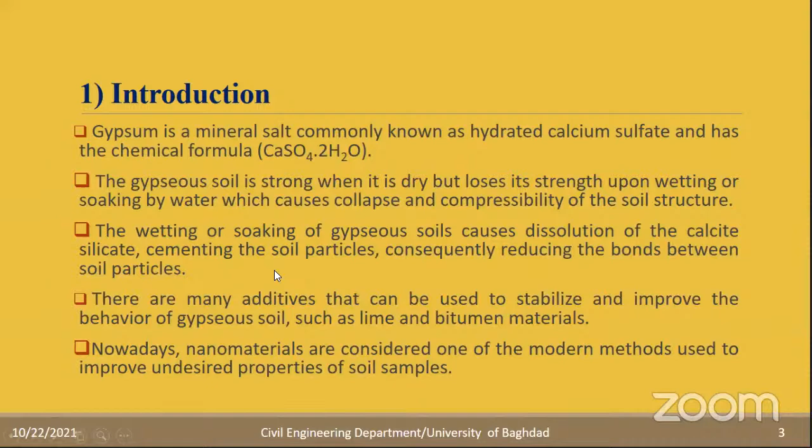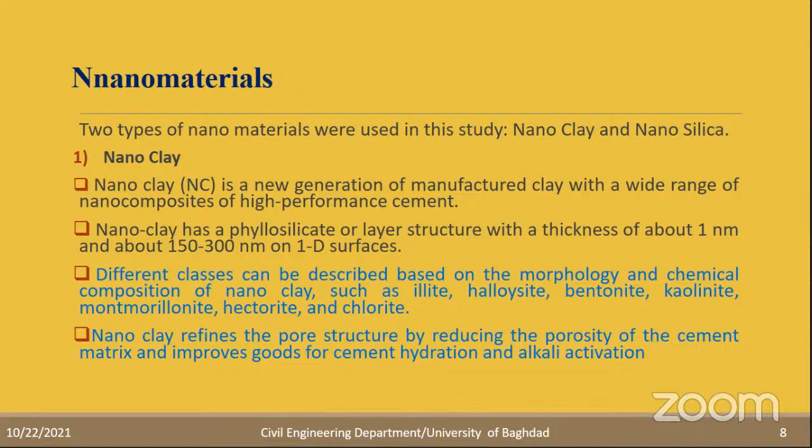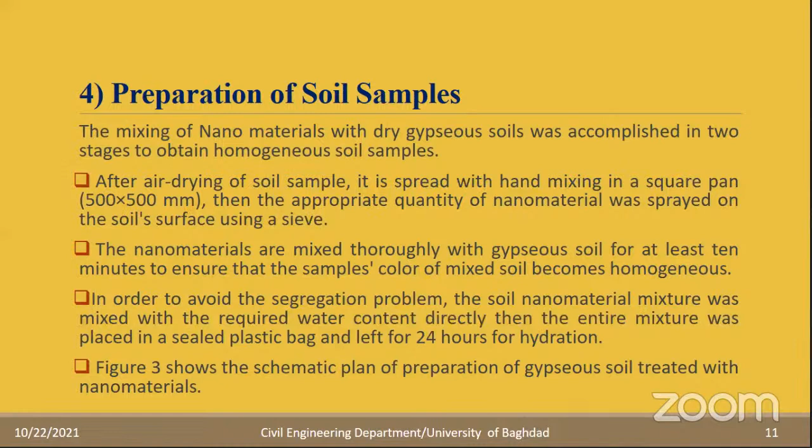Preparation of soil samples. The two soil samples, after drying and grinding, were each mixed with 3 ratios of nanoclay and nanosilica: 1, 2, and 4%. Then the soil samples were left for curing for 24 hours. Then we started the testing program. Figure 3 shows the preparation of the soil sample, mixing the gypsum soil with nanoclay and curing for 24 hours. After that, we can test. Also, we cured for 7 days to check the effect of nanomaterials on the shear strength parameters of soil.

Testing program. The testing program was on two soil samples. Each soil sample was mixed with 1, 2, and 4% of nanosilica and nanoclay. The effect of curing time was also investigated: 24 hours, 3 days, 7 days, and so on. The effect of soaking on the shear strength was also investigated. As I said before, gypsum soil is strong when it is dry, but loses its strength upon wetting or soaking. So it is very important to investigate the strength of gypsum soil upon drying or wetting.

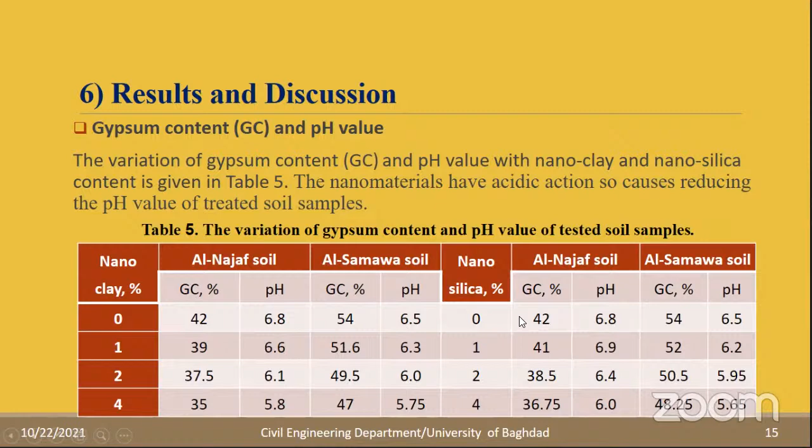Specific gravity and hydraulic conductivity. The specific gravity of soil samples mixed with the nanoclay and nanosilica increased, because the specific gravity of nanomaterials is already higher than the specific gravity of gypsum soil, which is mostly lower than 2.5. So using nanoclay or nanosilica will increase it.

Also, increasing the percentage of nanomaterials, nanoclay and nanosilica, reduces the hydraulic conductivity of the gypsum soil sample. That happened because of cementation between soil particles resulting from adding the nanomaterials, also closing the continuous paths inside the soil samples.

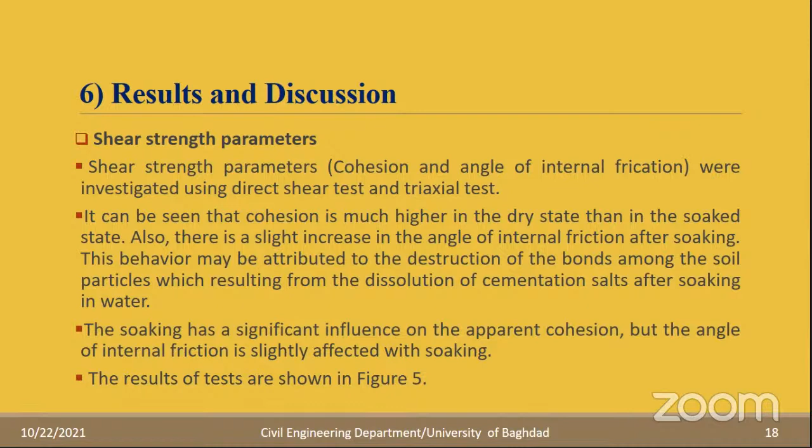Soaking has a significant influence on the apparent cohesion, but the angle of internal friction is slightly affected by soaking. The results of cohesion and angle of internal friction are shown in figure 5. Also, we can see both the angle of internal friction and the cohesion increasing with the percentage of nanosilica or nanoclay for Najaf soil.

Compressibility of soil: one important property is the collapse potential of gypseous soil. It was 15.6 for Najaf soil and 17.15 for Samawa soil. The collapse potential was tested using the single oedometer test at a specific stress, about 100 kilopascal.

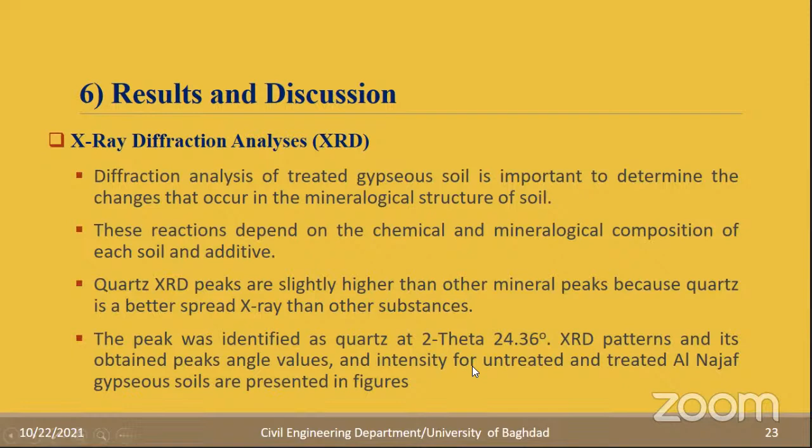Also, we can see the field emission scanning electron microscope, FESEM, images that show the change in the macro and microstructural development of gypsous soil due to the addition of nanomaterial. And we can see that the curing period is very important to give time for reactions between the nanomaterial and chemical compounds or minerals present in the soil.

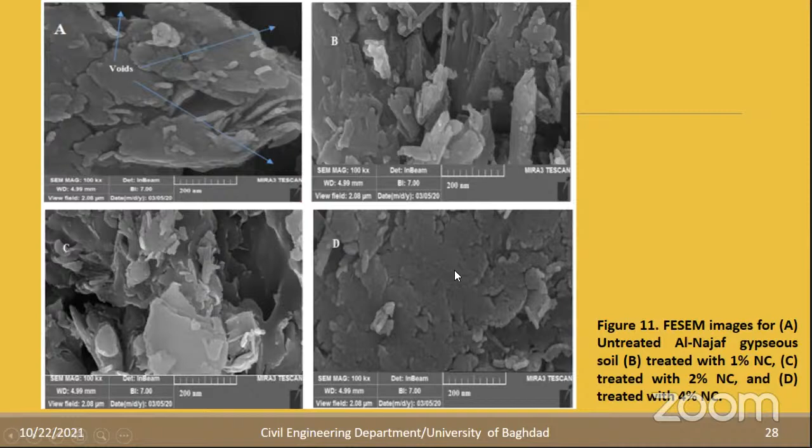So we can see that the image in A shows the gypsous soil before mixing with the nanomaterial. After mixing with 1% of nanoclay, in B, some of the voids are closed by nanomaterials. Also in C with 2% and D with 4%, mostly the voids between soil particles are closed by cementation resulting from mixing the nanomaterials with soil particles. The same behavior was noticed for the soil sample mixed with nanosilica, but mostly nanoclay is better than nanosilica.

Conclusions: mixing nanomaterials with gypsous soil causes a significant reduction in the compressibility of gypsous soil, but there is no worth in mixing more than 1 or 2% of nanomaterial.

There was a significant increase in the apparent cohesion of soil resulting from the cementation of soil particles by nanomaterials, but a slight increase was noticed in the value of the angle of internal friction. Also, the collapse potential of soil reduced after mixing with nanomaterial, but there is no worth in using more than 1% of nanomaterial for both nanosilica and nanoclay.

The hydraulic conductivity of the compacted or treated soil sample was reduced after mixing with nanomaterial, and the percentage of reduction in coefficient of permeability or hydraulic conductivity increased with increasing the percentage of nanomaterial mixed with the gypsous soil. The treatment of gypsous soil by nanomaterial increased the maximum dry unit weight, but at the same time increased the quantity of water required for permeation of the soil sample.

The results from X-ray diffraction, FTIR, and FE-SEM analysis indicated a new phase of the chemical activity of soil compounds treated by nanomaterials. The effectiveness of the treatment depends on the type and quantity of additives, type of soil, curing time, and pH of soil, which play an important role because nanomaterials are mostly acidic and may reduce the pH of the soil samples. References used in this paper.

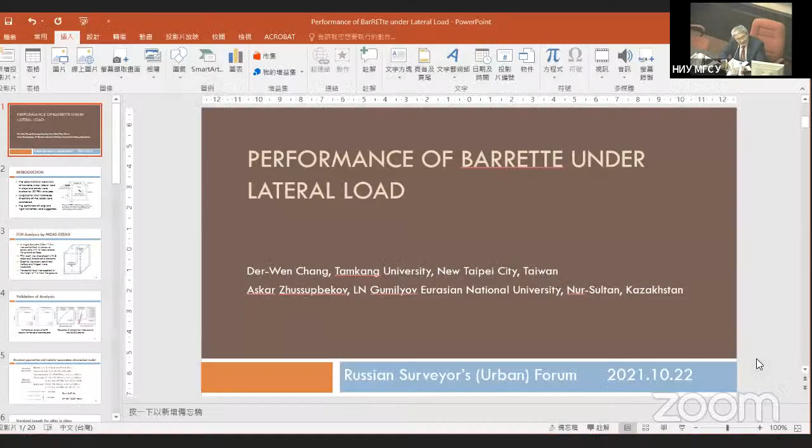Okay, I'm trying to share my screen with you. Did you see my screen? Not yet. Okay, all right. Now it's coming, but we wait. Is this okay now? Okay.

Okay, the title of my presentation is Performance of Barrette under Lateral Load. This is selected from a recent paper we published, and Professor Askar is my co-author. And this is the introduction of my presentation.

In this study, the deformational behaviors of the barrette under lateral load in clays and sands were studied by three-dimensional finite element analysis. The longitudinal and transverse directions of the load were considered. This is very important. When we see the barrette, this is the longitudinal direction, okay?

The longitudinal direction means the load is applied in the lengthy direction. When the load is applied in the short direction of the barrette, it means the transverse direction. And the definition of the long and the rigid barrette was suggested in our papers.

And this is the paper I mentioned. The original name of this paper is Length Influence on Lateral Performance of Barrette from Three-Dimensional Finite Element Analysis. It's published in the Journal of Applied Science and Engineering, a journal hosted by Tamkang University.

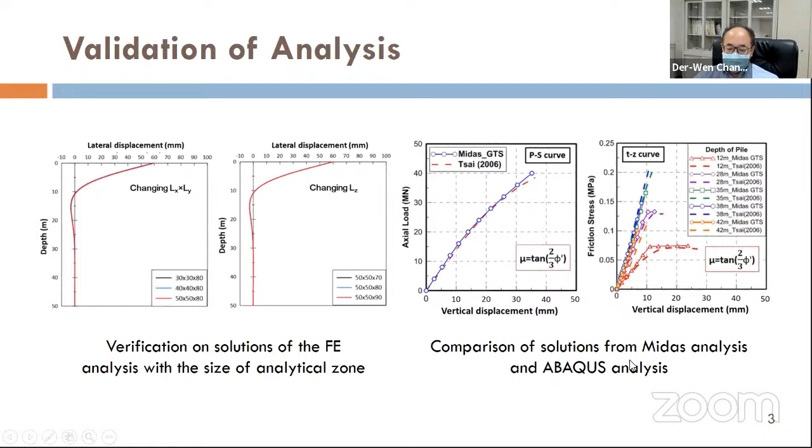And we tried to make some validation of the analysis. As you can tell, we tried to increase the size of the mesh to obtain a stable and converged solution from the analysis. We also made some comparisons with studies by other people using programs such as Abaqus, also a finite element program.

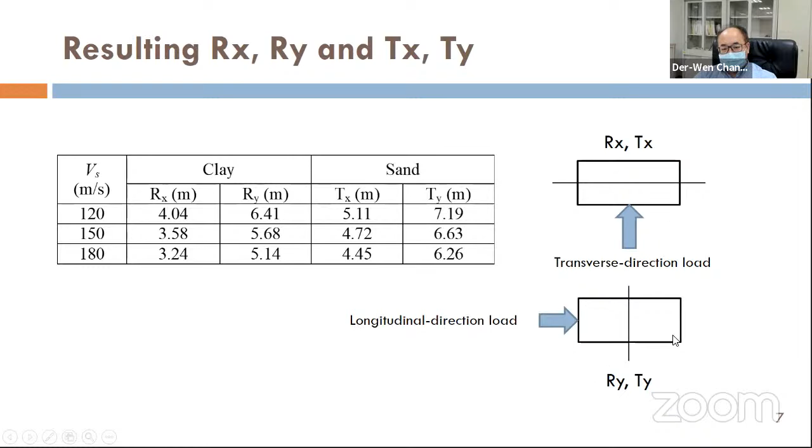And this is the Rx, Ry, and Tx, Ty in our study we calculate, because our shear wave velocity has changed from 120 to 180, and in clay and in sand you can calculate different R and T. Okay, and Rx and Tx mean that the load was in the transverse direction of the barrette. And when the load was in the longitudinal direction of the barrette, then we calculate Ry and Ty.

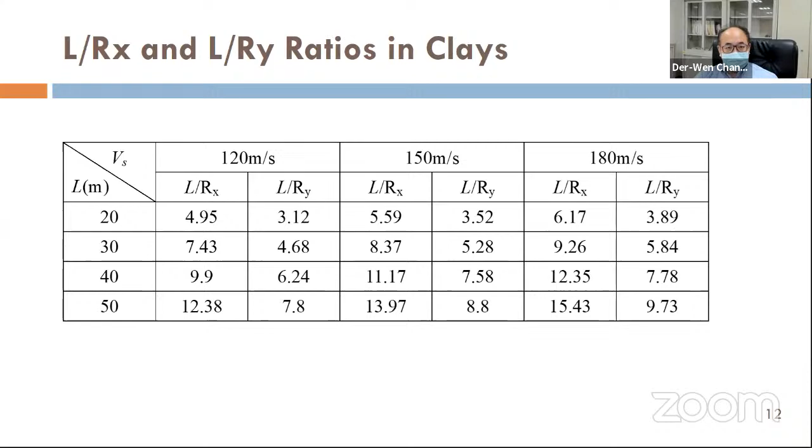So yeah, okay. For longitudinal direction load, we find out that if L divided by Ry is greater than 7, we can define the long barrette, and L divided by Ry less than 3 is for rigid barrette. For transverse direction load, if the ratio is greater than 5, it can be used as a criteria for long barrette.

No criterion is suggested for rigid barrette because most of the things we calculate are always greater than, or around, 5. So we don't have the data for the L over R ratio less than 5. It's difficult to determine the rigid barrette for the transverse direction load.

And Professor, lastly, you have 3 minutes. Okay, I'm about to finish.

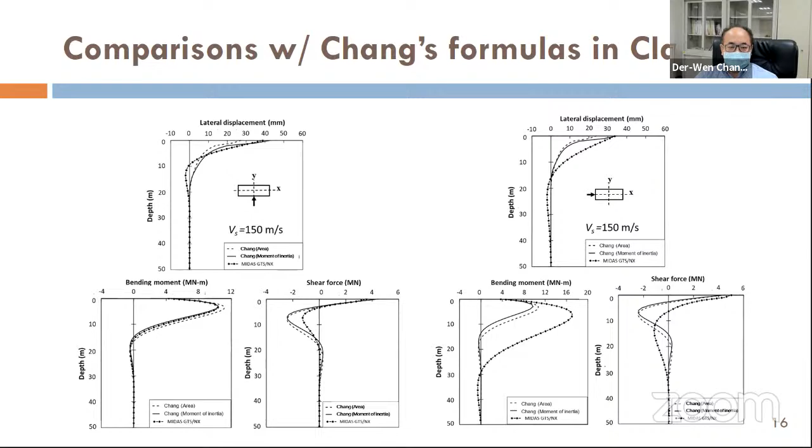We find out the analytical formula suggested by Chang in 1937 on single pile subject to lateral load was found adequate for the barrette in the case where the load is applied in the transverse direction. In order to resolve that, an equivalent pile diameter must be used, obtained from the moment of inertia of the barrette. In any case, if the load was applied in the longitudinal direction, the analytical formula would underestimate the bending moment along the barrette.

This is all the things we found in this paper. If you are interested, you are free to check this paper. Thank you very much for your attention.

Thank you very much, Professor, for your interesting presentation. We have time for one question. Please. Yeah, very understandable, huh? Okay. Thank you very much, Professor Der-Wen. You made a very good presentation, so no questions, very clear. Thank you very much. Please check everything, if you are interested, please feel free to check our paper. By email or in future we will communicate with you. Thank you. Thank you. Thank you.

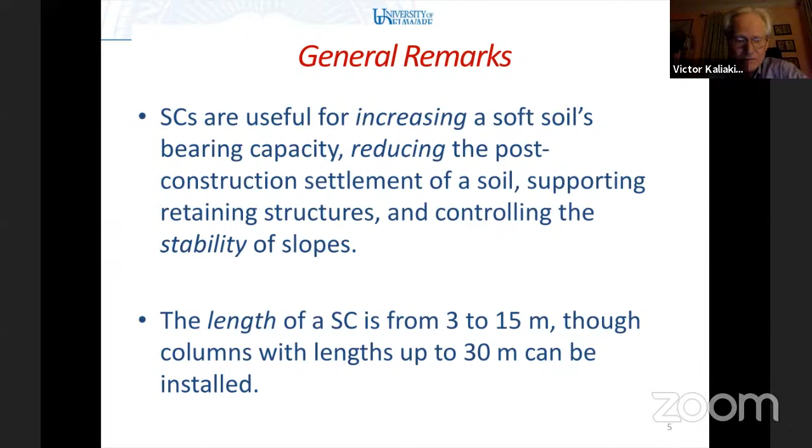One of the problems with a regular stone column is that when installed in very soft soils, typically with shear strengths less than 15 kilopascals, they exhibit a lateral displacement called bulging, especially in the upper region. This largely reduces the stone column's ability to take load and is a limiting factor in their application.

These low shear strength soft soils are prevalent in many parts of the world, so people sought to somehow improve the stone column's performance when installed in such conditions.

The key was to encase these stone columns with some kind of geosynthetic material, typically a non-woven sock, essentially a tube with an end cap of the material. Because it is encased, when load is applied the geosynthetic is mobilized and provides confinement, which increases bearing capacity and reduces the lateral displacement we call bulging.

This confining pressure forms what we call the geosynthetic encased stone column, or GESC, which will be our focus in the talk today.

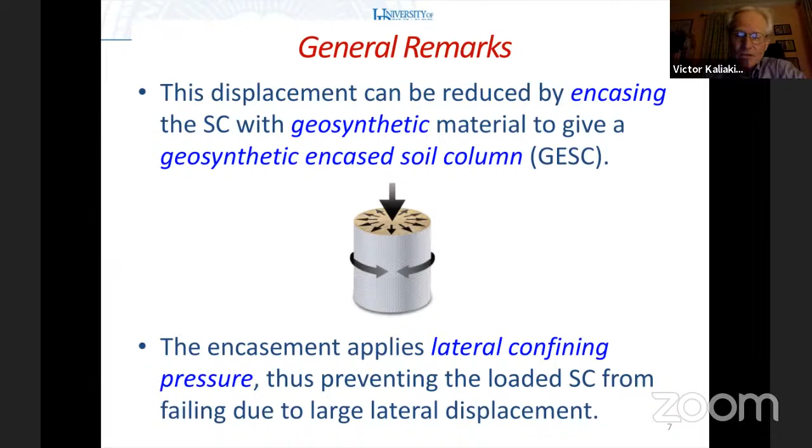Once this was realized, a good amount of work was performed, because geosynthetic encased soil columns are used in geostructures where we need to moderate relatively low to moderate construction-induced settlements.

The prime application was column-supported embankments, as shown in this cartoon, where a roadway or maybe a train runs on an embankment sitting on these geosynthetically encased columns, each taking some tributary area of the structure above. Traditionally these columns would bear on a rigid base, providing support from below using end bearing as the primary support mechanism.

Traditionally, these elements—either stone columns or geosynthetically encased ones—have been extended to a hard layer or stiff stratum, counting on bearing capacity, as shown in this cartoon.

You have some kind of applied load, the column with its encasement, and the bulge or lateral displacement as shown. But the key here is that it's sitting on a firm stratum, which provides substantial end bearing to allow load transfer.

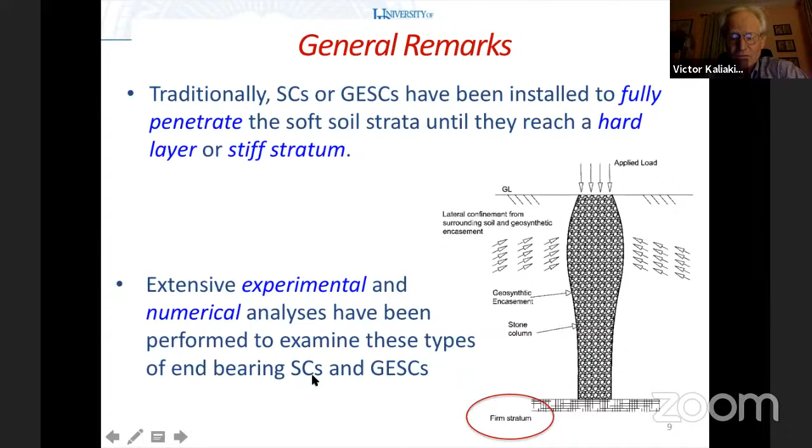Extensive experimental results and numerical analyses were performed over the years to compare geosynthetic encased columns to unencased regular stone columns. Several years ago, my former student Majid Khabazian and our colleagues performed many kinds of analyses, from single column analyses to modeling complete embankments, and also looking at the unit cell concept.

I'd like to present a few results for a single geosynthetic encased soil column bearing on stiff strata, to give us a reference point for a traditional type of analysis.

The same holds for relative vertical displacement—again a big effect—but even more so on skin friction, which I think many people understand better than relative displacement. When we encase a column, the skin friction is affected substantially. This is for a single column, but it would certainly have an effect when you had groups of such columns in an actual foundation.

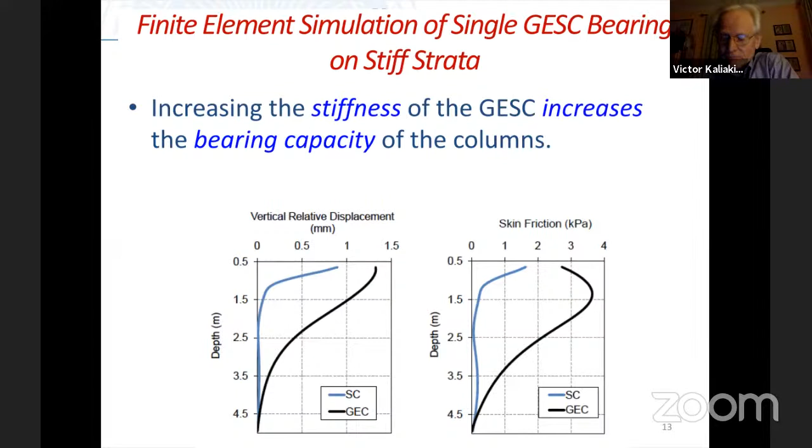Finally, load transfer mechanisms: a stone column by itself, with no encasement, has some end bearing and some skin friction. But compared to a geosynthetic encased column, you can see much more end bearing, and again skin friction is more sizable because of the addition of the encasement. This led to the use of such encased columns in many applications.

Again, typically sitting on a rigid bearing, a rigid layer or a stiff stratum. The realization came, though, that this is not always possible, that sometimes the deposits of clay are very deep or large, especially in coastal areas. And perhaps also we may not want to have the column extend completely to a stiff stratum because of economic reasons. So the question raised was, can we look at columns of these type, encased columns, but that are not driven to stiff strata, because this may be problematic.

So the cartoon is here now. You can see the similar kind of column encased again, but it's not resting on the firm stratum. There is some kind of what we call floating depth below the column for either economic reasons, or if in a very deep clay layer, maybe you cannot reach the stratum in a practical sense. So this is the focus of the work we're talking about today, looking at columns which are floating, if you will, not reaching that stiff stratum, to see how they behave.

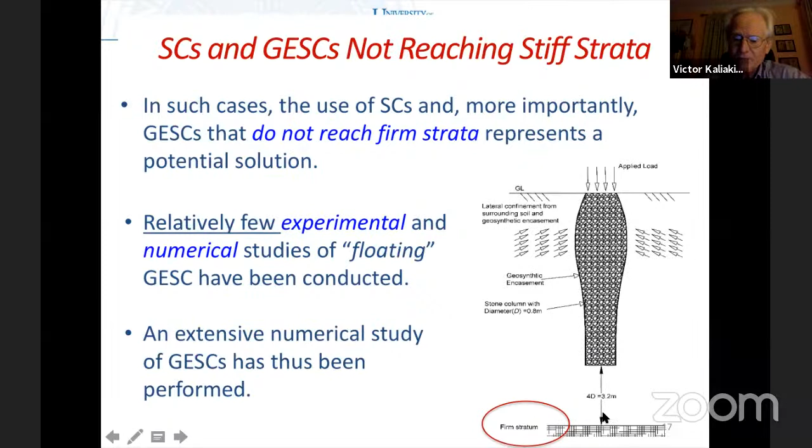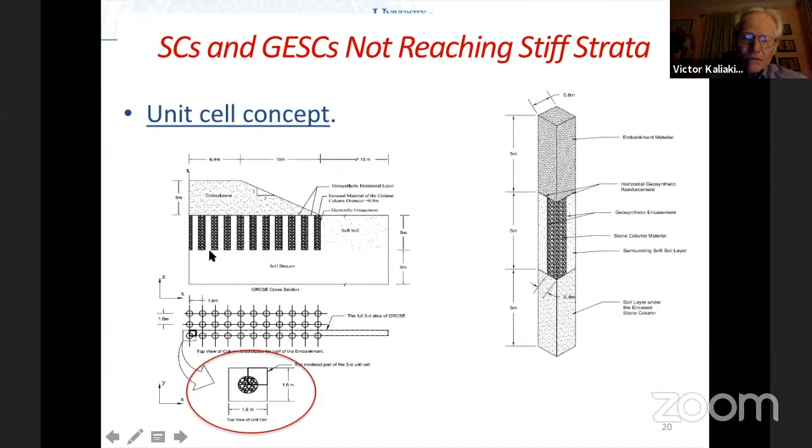We then also finally looked at the unit cell concept, which again relates to a full embankment, but it looks at just one small piece of this. So the model looked something like this, much simpler than the complete 3D model. This is a 3D unit cell model with, again, a floating depth below the base of the column, but above the rigid stratum. So this was extensively analyzed, but now the difference being we had floating columns in all these analyses. My focus here is on single columns because of lack of time.

We found that in our analyses for both rigid and non-rigid based columns, the lateral displacements were about the same, and the bulging extended to about 7 or 8 column diameters when measured from the top of the column. So that meant that it did not matter so much if you were resting on the rigid base or floating, if you will, that the lateral displacement was still about the same and was greatly improved by the presence of the encasement.

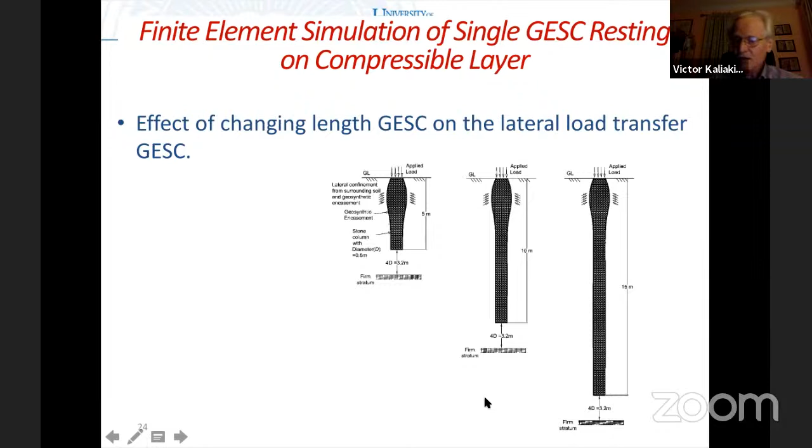In this case, we looked at 5 meter, 10 meter, and 15 meter columns, all of them floating in the sense that they're not resting on the firm stratum, and compared this again to a column resting on a rigid stratum. Now, initially, due to end bearing, short columns resting on a rigid stratum will certainly have high bearing capacity.

And so as you get longer columns, the fact that it's not resting on a rigid base is not detrimental. So if you want to not reach a rigid stratum, or can't because of financial constraints, as long as your column is suitably long, you may be getting the same effect as a column on a rigid stratum. That's an interesting finding, because it now makes these columns resting on non-rigid bases competitive to ones on rigid bases.

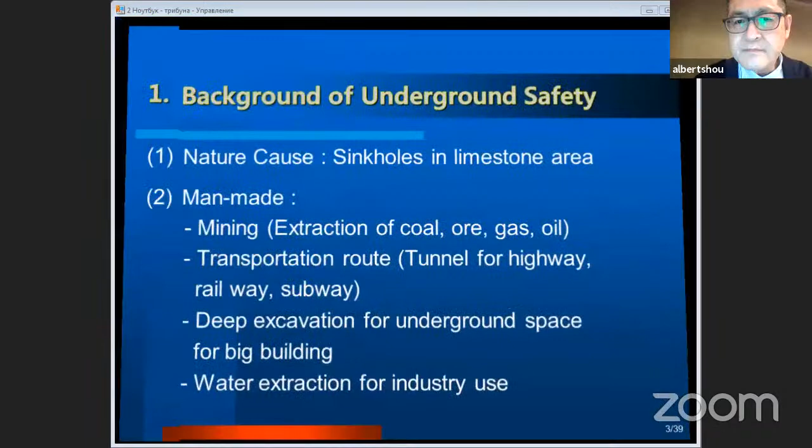So there are several reasons for ground collapse. Natural reasons: limestone areas, Malaysia or the southern part of the United States, and many other countries with karst areas, limestone, normally have sinkholes. And man-made: in Russia, subsidence of mining areas, mining towns, because of digging out coal, minerals, and so on.

And also in downtown areas we have a lot of problems because of tunneling, metro, highways in downtown areas, without any control of the bracing system or groundwater. Another one is water extraction from industrial areas. That may be a big problem. And deep excavation for underground space development, basements for buildings and so on.

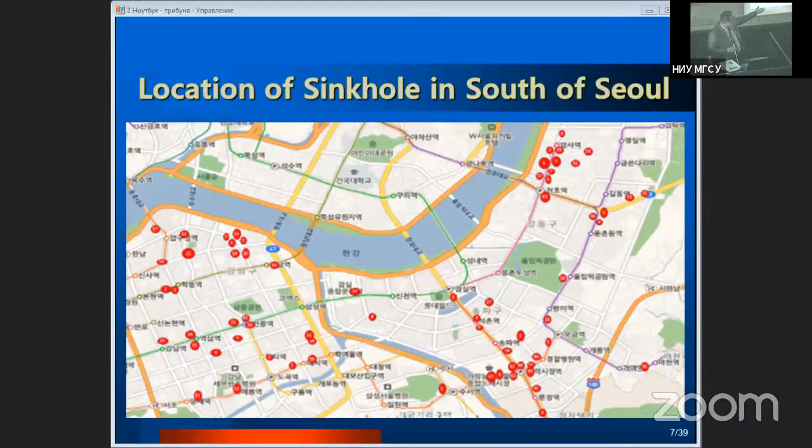Or the sinkholes that occurred. The red dot is a sinkhole, see? Most of the sinkholes occurred in the southern part of the Han River because of a lot of development, so that's why this phenomenon is happening. With the sinkholes and the ground excavation, we have a lot of problems, cracking of the ground surface and so on. And some people sunk down here. So a lot of problems were created.

What happened? They were digging out the soil underground, and then the water in the lake was disappearing, reducing. So a big problem, so the government became aware of this problem.

Oh, what the hell? Oh, it's not taking this program. Anyway, we have another view. Oh. Okay, here we go.

So at the bottom, the last one, there was a metro line under construction. Above it, there's an underpass. On the top there's the ground surface and the high-rise buildings. Meanwhile, we have a lot of sinkholes here, on the right-hand side, and the left-hand side.

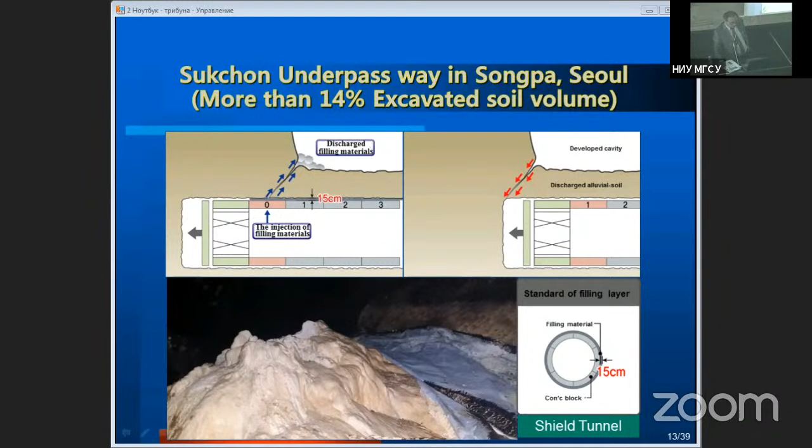And this shield machine is drilling the tunnel like this. So we have sinkholes in several places. We also have old tombs and so on at the top. And we found out, after the shield tunneling, you should backfill the area, but all this backfill comes into the underpass. So it's a problem.

And not only in Korea, but in other countries. I know in 2013, Professor Ilyichev, president of the Russian Geotechnical Society, came to Korea, to my university. He presented a paper about metro construction work in Moscow. Many years ago, you had a similar problem. Also the UK and the United States, near Florida: all of a sudden a high-rise apartment complex collapsed. Evidently there was a sinkhole down below. Even in developed countries it happens like that.

So during construction work, you need good control of the displacement and also waterproofing. Otherwise, you have a lot of problems. Factors influencing the ground surface include the soil properties and so on. All of this occurred in July, because July and August are the monsoon season, a lot of rain comes into the ground. And mostly the detrimental effect came from old sewer lines, wastewater lines, maybe more than 20 or 30 years old.

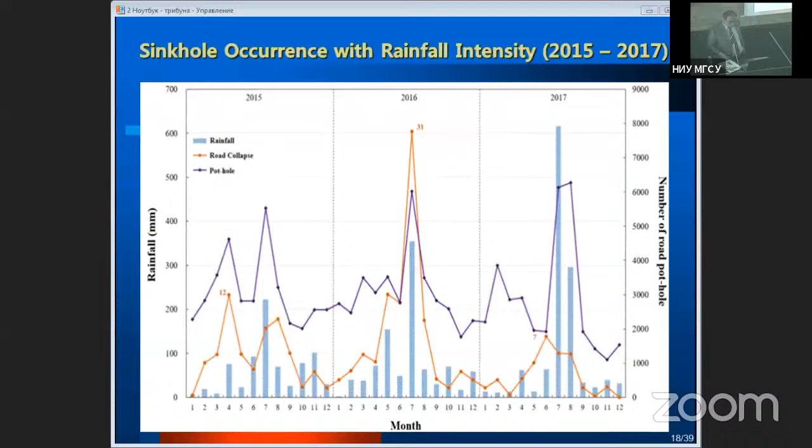During the excavation, vibration and loosening soil loosen the connection parts, and when heavy rain comes, water seeps down. That creates a big problem, we found out. Another factor is rainfall intensity, all happening in August or July. So we've got to be very careful.

We requested that the government and the Congress establish an underground safety law. So we are good friends of the politicians. See, engineers, if you are not working and you need something, work with the government and the politicians. Put it into law, so we can get a job.

Now they acted in 2018; the government made an order. If we excavate more than 10 meters, you have to submit a small-scale underground safety assessment report to the government, okay? So your home is okay, the government will control the safety. But if we have more than a 20-meter excavation, a heavy report on the assessment of underground safety. So this is a really great deal.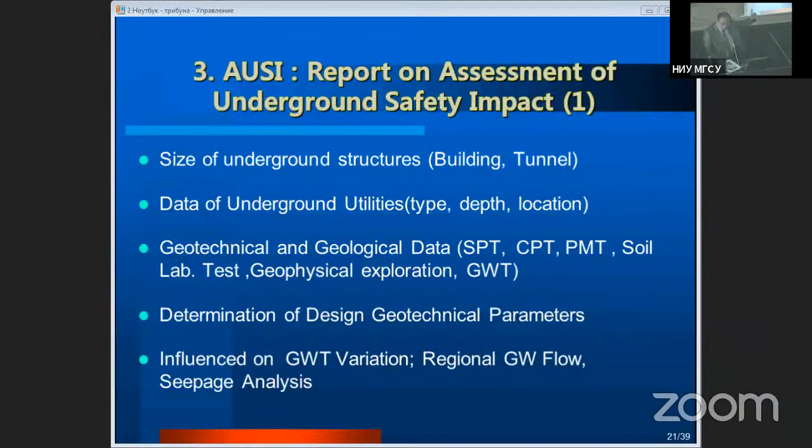So the report should include all these data: underground utilities, and also geotechnical data, geological data. This is very important. They like to have a soil investigation. So if you spend more money on soil investigation of what the ground is like, okay, you're safe, and you save money. This is more important. You need more than 3% of the total budget, then happy. Somebody says 1%. That's ridiculous, you shouldn't allow that.

So like this, gravity stability, stability of underground. This is a chart. Okay, in the report you should write one by one, following all these. So that's very important. Okay, they write a detailed report.

Many young engineers should do it. In South Korea, many companies want to hire young engineers. They don't want to work for the private company. We'll give you good money, $30,000 or $40,000 per year, but they don't want to work. They want to work for the government and relax, a government company. That's too bad, we don't like it. But anyway, this is important, so you should negotiate with the parliament, congressmen, and put it in the law.

And the monitoring, many regulations. Russia also had a regulatory requirement, right? To control the safety. And the British also, we looked at it, and the Korean standard. And this is one of the examples I just found before coming here.

This is a 9-story building, and this is Incheon Bay, we have a coastline here, right? This is a bay, and if we excavate, what happens? Seawater will come into the basement here, underground, unless we have a good water barrier system. So this is one example, like this braced cut. We have struts, anchoring, or slurry wall also. So maybe somewhere here an underground utility is very dangerous, because of deep excavation, water seeping out, there may be some settlement problem. So we check out everything.

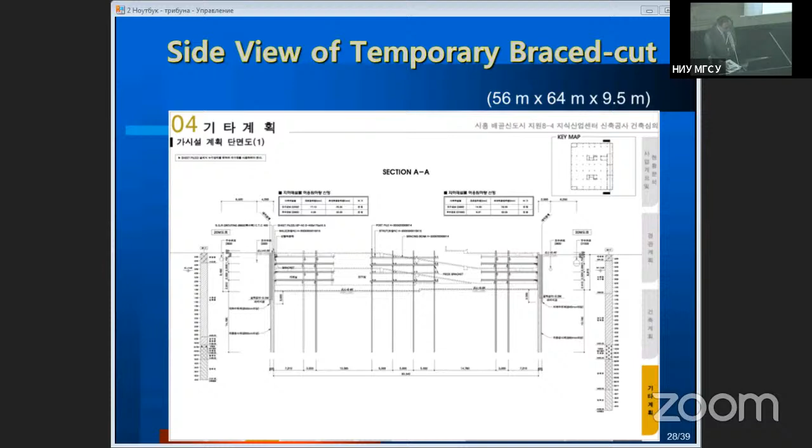I'm one of the experts, and also instrumentation: inclinometer, groundwater table, strain gauge, settlement plate, and so on. These are the monitoring devices. And not only this site, also in the adjacent building, we put gauges. You can see it during the excavation. If we do deep excavation, we have an automatic monitoring system. There's a red light, yellow light, green light.

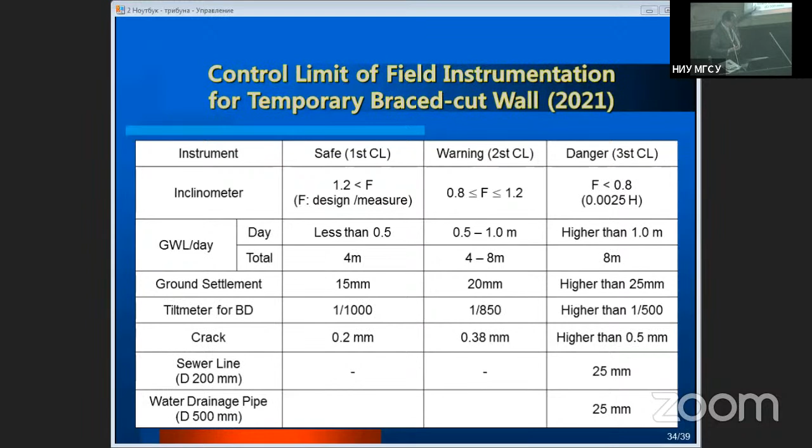So for the displacement, any variation below the allowable line, green light. But with a large deformation, maybe the yellow line, warning, and red light, stop construction work, like this, okay? So this is the variation of allowable settlement and so on. This guideline is very important, so we follow this rule. You write the report and the numerical simulation, for small size, the water seepage, and the larger area, mud flow, ground control. So these are the values we follow, okay? I could go into all the detail, tilt meter and so on.

And also during excavation and tunneling, sometimes rock blasting, boom, like this. So there's noise, okay? And some vibration, in kine, right? Centimeters per second. So for livestock, national treasure buildings, residential areas, we normally control 0.3 kine, centimeters per second, right? Like this, okay?

Even in residential areas. And this is the noise level, boom, a big sound, so your baby is crying, right? Your baby is crying, so what do you do? Blast at 11 o'clock, okay? Two times blasting, 11 o'clock or in the afternoon, 3 o'clock. The husband goes to the company, the housewife washes dishes and then goes shopping at 11 o'clock and 3 o'clock. So we blast like this, civil engineers.

We are very clever, so see, this is important. This year alone, for the estimation of underground safety impact, there were about 1,000 cases at the 10 to 19 meter depth, and another 200 cases for excavations greater than 20 meters deep. So by the money, how many people can work there? Geotechnical engineers are very happy, very busy, so you can make good money out of it.

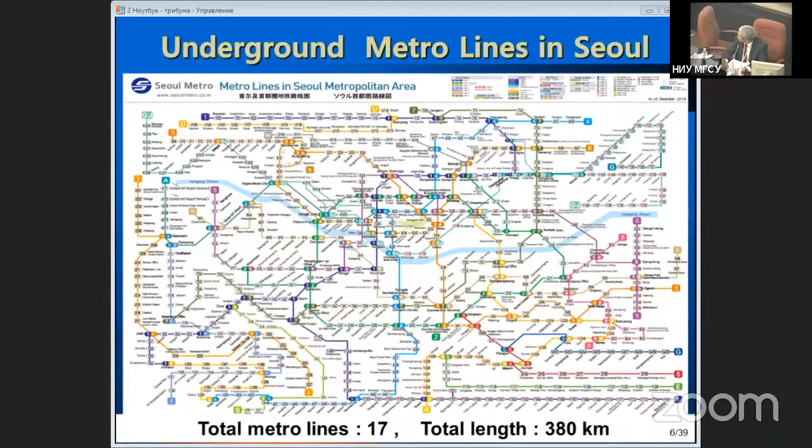I don't know about Kazakhstan, you may have it very soon in the Astana area, so you've got to replace the old pipelines. So we don't control it, but it's very good for geotechnical engineers anyway, we're happy, anything happens, we have a job, construction work in downtown Seoul. Thank you, Professor, for your interesting presentation.

So now we must move to another question. One question from our moderator, Professor Shulyatyev. Thank you for a very interesting presentation.

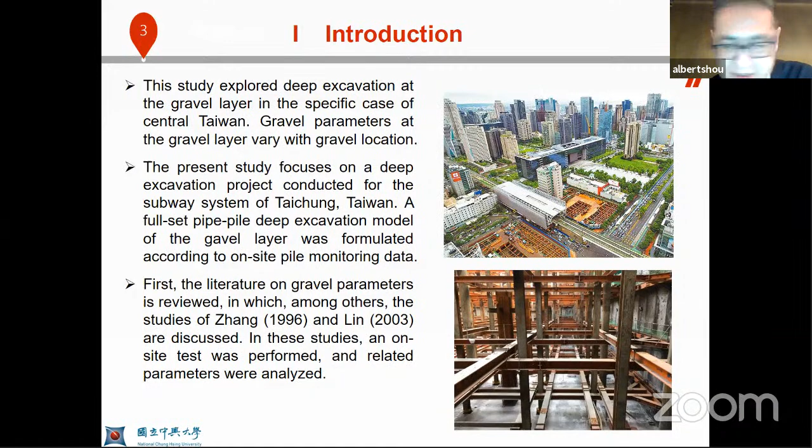This study can be separated into two steps. The first step is to do a literature review to see what the range of parameters would be. Although we do have some projects done in this area, we tried to collect the data first, then do sensitivity analysis and try to match results from numerical analysis with the monitoring data, so we can have a better idea of what the actual parameters would be.

The numerical model we applied is FLAC3D, and these are the theories behind it. I think you can easily find that, so for the sake of time I will skip this part. Basically, it can be described as the damage strength part and the anti-tensile strength part. There are a lot of parameters behind this theory, but we try to use this model to do the three-dimensional analysis in a very simple way. We use the Mohr-Coulomb criterion for the analysis.

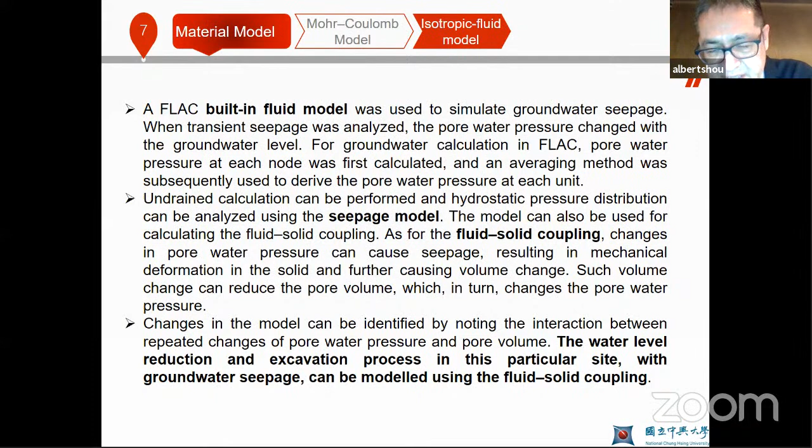Since there's a groundwater condition on this site, we also use the built-in fluid model. The seepage model is considered, and also the water reduction and excavation process on this site were simulated by the numerical analysis. We have detailed numerical steps to simulate the construction and the groundwater condition, since we have a dewatering job through the excavation. So the fluid-solid coupling model was applied, and the construction steps, support steps, and dewatering steps are also simulated by this three-dimensional analysis.

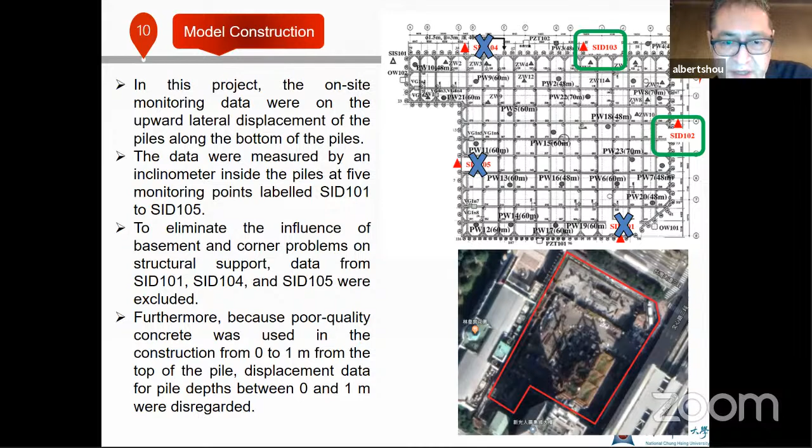The first step is, if we use the average parameters, the monitoring data and the numerical results are not totally right, especially the maximum horizontal displacement—there are some discrepancies. So we try to use different friction angles first, to see which friction angle is more feasible.

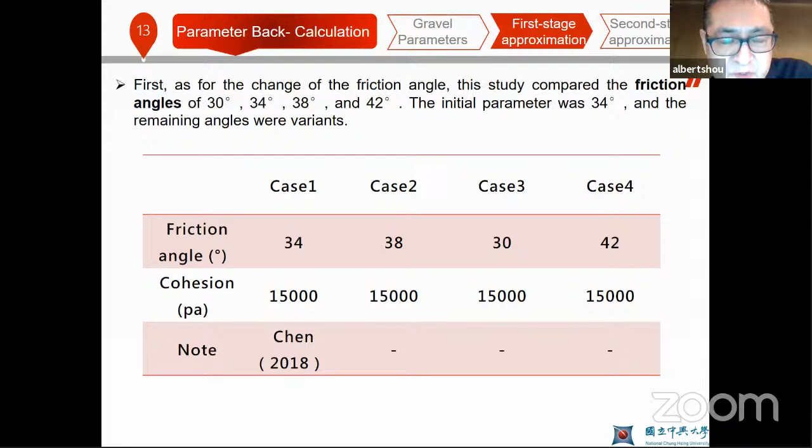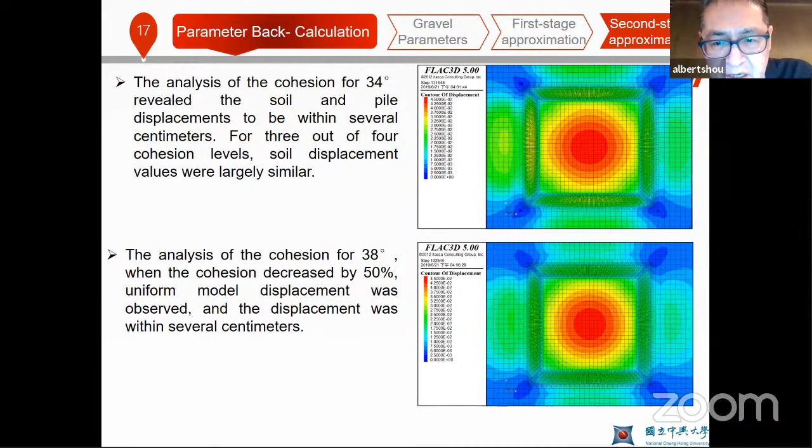The results suggest that 34 degrees with 35% reduction of cohesion, and 38 degrees with 95% reduction of cohesion from the average value, can get the closest results. But for the second case, the 38 degree case, we found that there are some plastic strains appearing between the casing piles. I think this is not right, because in the field there's no such behavior.

So finally, based on what we analyzed, we suggest that a friction angle of 34 degrees with cohesion of around 9,750 Pascal could be the best fit parameters for future design in this area.

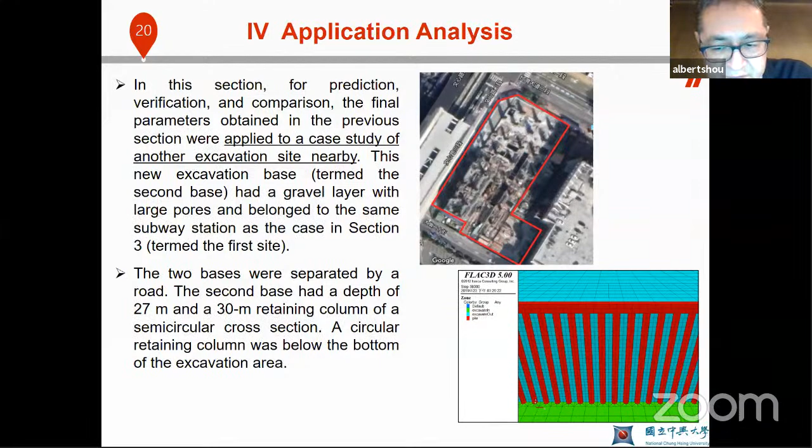Then we used this data for the other site, since we have 2 sites, to verify it and see whether it is correct or not. The results suggest that the maximum number is close to the monitoring data. However, the depth of the largest horizontal displacement is not in very good agreement—there are some discrepancies.

The discussion about the discrepancies can be summarized in 4 points: the soil parameters could not be exactly the same, because this is alluvial formation, and also the geometry of the excavation for the 2 sites is not the same. Third, the groundwater condition could affect the analysis results. Finally, there might be other labor-related conditions that could affect the results.

So I would like to skip this one.

Finally, I would like to give a brief conclusion. The results suggest that 34 degrees with 35% decrease of cohesion could be the best fit for the data analyzed in this area. Also, on-site data and test results could be suggested to avoid the discrepancies seen at the second site. I think other factors should also be considered to make sure the data is more suitable for the specific site. So this is the conclusion.

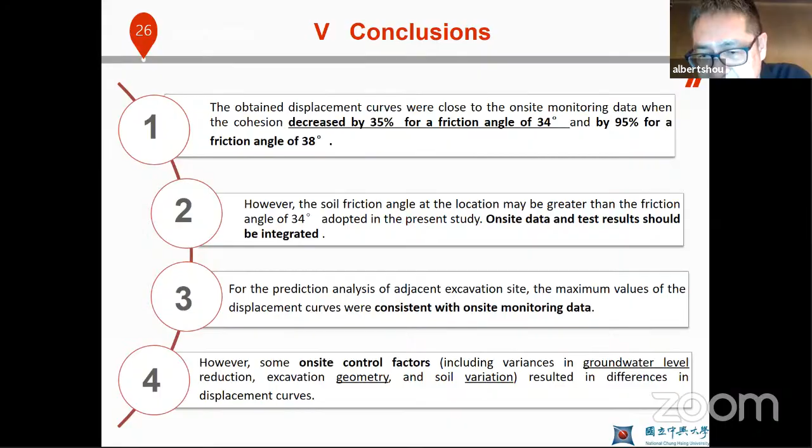Is there a question? So thank you, Professor. You made a very clear presentation, so no questions. No questions, okay, thank you very much. Thank you. Okay, safe trip to you. Thank you, see you later. Bye, see you.

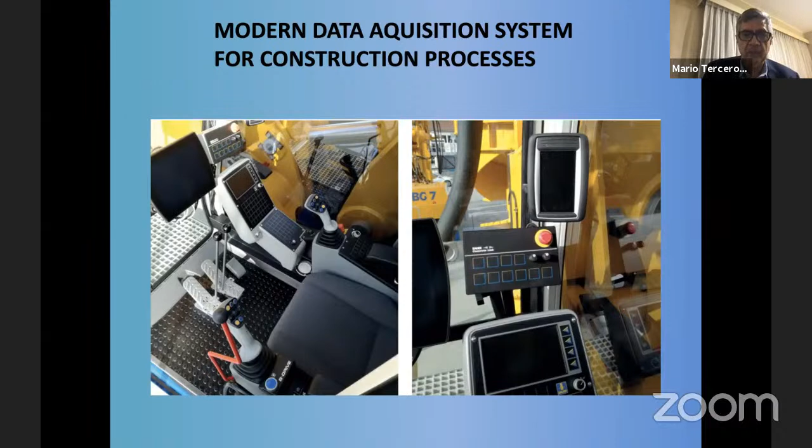In our recent experience, we installed around 600 piles, and we had all the information with these methods, then we performed 3 or 4 loading tests, cross-correlated, and the difference was less than 10%. So the more information we get, the better we know the results. So the question remains: what about when the information we get while installing piles is not possible to correlate? For example, if I'm drilling a pile I will get depth and torque, but it's very difficult to correlate that with the capacity of the pile unless I perform a loading test. And mainly in drilled piles, the problem is the tip.

So now we will present 2 technologies that not only highly improve the behavior of the piles, but also allow us to know what is happening in 100% of the pile toes.

Oops, I don't know what's happening.

Okay. The first is tip grouting, which we call smart cells. When we know the behavior of a pile, the response of a drilled shaft, we know that we have the tip resistance and the friction resistance, and the first problem we find is the non-compatibility between the allowable deformation of the shaft and the tip. So that's a typical curve for shaft and tip resistance, and we can know how much we would need to move the tip in order to get the maximum resistance, or at least the highest possible resistance.

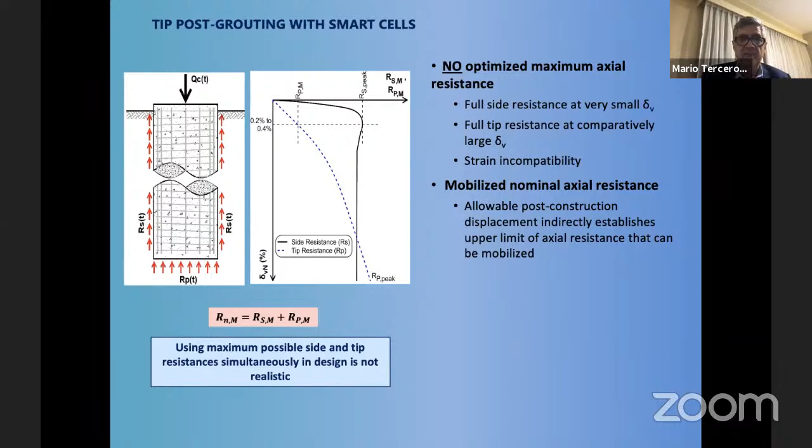What happens if we grout the tip? For tip grouting, we can have several methods, from open grouting with tube à manchette, with the flat jacks. But all those methods just give us raw information about the volume and the pressure. But if we don't have confined the pressure, the problem is that we really don't know accurately where the grout is going. And if we don't have enough deformation of the element, we are not really improving as much as is possibly needed. So what we will present here is a method.

It's like a bidirectional cell, but of course not so sophisticated nor so expensive. So we can not only compact and preload the tip of the pile, but also we measure with telltales the movement of this cell. So we are performing a loading test in 100% of the pile toes, while we are knowing the soil conditions and we are knowing really the resistance of the pile.

That's the typical presentation, where we have here an ungrouted tip, and here we have a grouted tip. What is happening there? We are pre-mobilizing, we are pre-deforming the tip. So the pile, when it starts to be loaded, first has to overcome the preload we had. So in that case, we are making a much stiffer pile with a much stiffer response, and with a very important compatibility of deformations for the maximum load of the shaft and the tip.

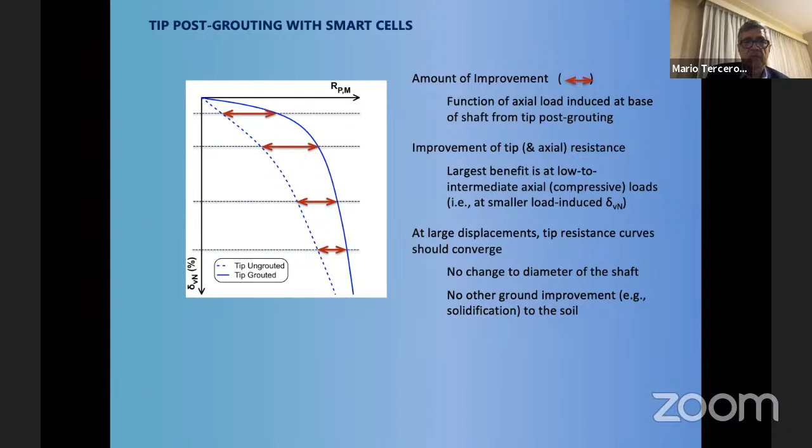This is just a sketch, but mainly in the smaller to medium deformation, let's say up to 100 millimeters or 150 millimeters, where almost no structure will have this allowable deformation, we can really get a big improvement, because if we move a pile, let's say 30 centimeters, of course it will converge with all the improvement of the bottom soil, but that's not acceptable in any kind of structure.

So the question is, why do we perform it? The first thing is we optimize design, because with exactly the same pile, we can increase the resistance dramatically. In some cases, we have measured up to 100% improvement of the pile resistance. And in that case, the risk is mitigated because we know what will happen. We know the behavior for each single pile.

And the scary thing is that in some cases, even for one block, we have a really big variation of response, mainly in very new soils, quaternary soils, close to very new rivers, where the sediments are really erratic. Knowing that, we have very high quality control, quality assurance. And of course, if we get a stiffer response, we will get cost saving and time saving. In one project with 90 piles, we reduced 6 meters per pile. So the construction time was significantly smaller, and also the final cost.

This is the typical presentation where we have this element. We surround it with a geosynthetic because we have a controlled leaking in order to cement the cell outside of the main body. And here we have more details of how it works; it's like a bidirectional jack. And the good thing is that we also have, and here I forgot to draw it, telltales. So when we move the cell downward, we know for each pressure the force, multiplying by the area. We can know the deformation.

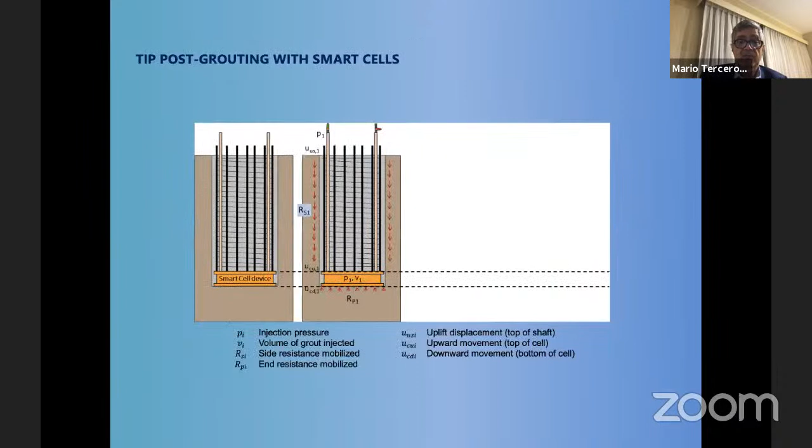Here is the general presentation of the cell, what's happening, and you can see that starting from the closed cells up to the open cells, in some cases we can even move the pile upwards. And in some cases we have calculated that the assumed friction or shear resistance was 4 times the one we measured. So the problem is that in some soils the calculations are very, very far from reality.

So what are we doing? We are premobilizing the tip resistance while stiffening the soil. So we are greatly improving the performance. This is a real case where we started to mobilize the cell. So we had a very low stiffness. This part is always around 20 and 40 millimeters, and we consider it debris compaction. Then we start to compact the natural soil here, and at a certain point, this compaction is very small because the shaft starts to move up.

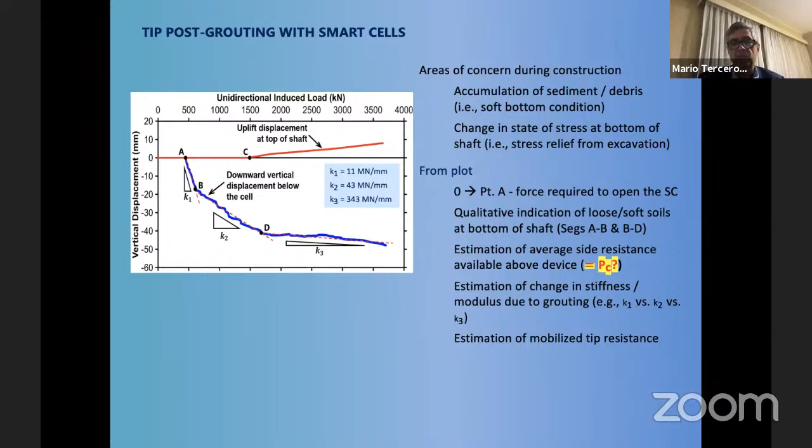At a certain point, the shaft will move without any additional movement at the top, at the bottom. So this is a typical bidirectional result. So here we got 3,500, but summing both, we put 7,000 kilonewtons for a pile that was designed to work at 5,000 kilonewtons. So this pile will have only elastic deformation at the moment of the service load.

And here we show that those are injections for different piles in the same block. The same here. Here we can see the differences that are much bigger than here. Okay, those are not so important to present now.

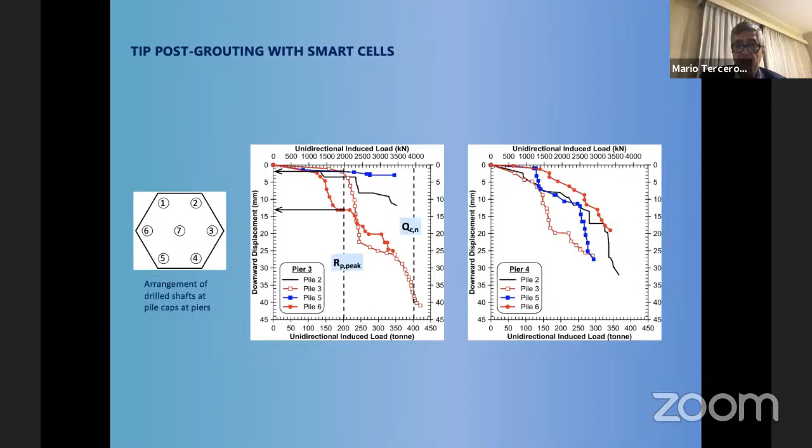And in a mini case story, a work we finished 3 months ago, we have here the soils, we have all the information, and that's the interesting thing. In a block with 7 piles, those were the injection records. We mobilized up to 40 millimeters, but when we performed the static load test, the maximum mobilization for 900 tons, 9,000 kilonewtons, was only 10 millimeters. So this pile could have resisted twice what it was designed for.

Okay, some conclusions of this method. As we talked: preload, premobilize, compact soil, optimizing design, stiffening the formation, reduction of post-construction settlements. We can shorten the length quite a lot. We also have all the analytical methods. The FHWA has a very good compilation for this type of design. We have a reduction in carbon footprint, and of course the compatibility of the formations.

The other method, which I will go through as fast as possible, is the expander body, which basically is a steel balloon that you install at the bottom of a pile or of an anchor, and once there it is expanded by injection of grout. So we pass from 12 centimeters up to, in some cases, 1.2 meters. Typically, we use between 600 and 800 millimeters in diameter. And okay, here are the models.

And what are the advantages? We can have a very important cost reduction. The time reduction is great, because if we double the capacity of the pile, then we diminish the quantity of piles to be done. And we can know, with a curve that I will show, the behavior of the soil, like a pressurometric test. We have even used it in one case in very soft rock, not to mobilize the rock, but to get a very high shear resistance between the rock and the element.

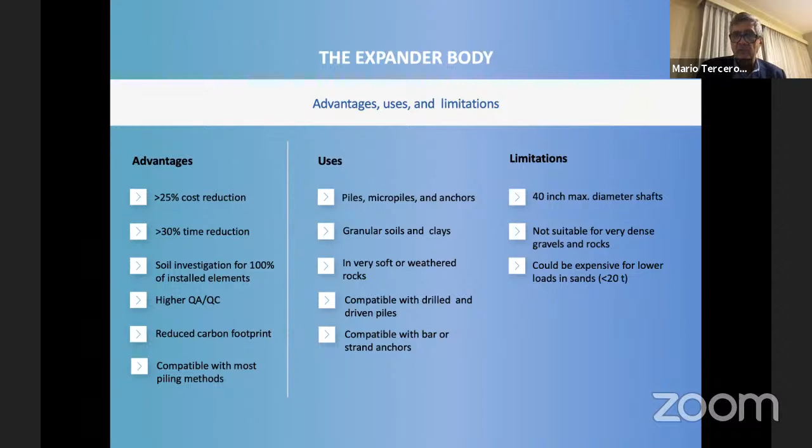Of course, the limitations: for low loads it is not an advantage because you always get high resistance, and typically the shaft should be less than 1 meter. So the maximum loads we have got in service are around 5,000 kilonewtons, but for many buildings that is more than sufficient, because we have blocks. In one case, we had a block of 200 piles of 300 tons each.

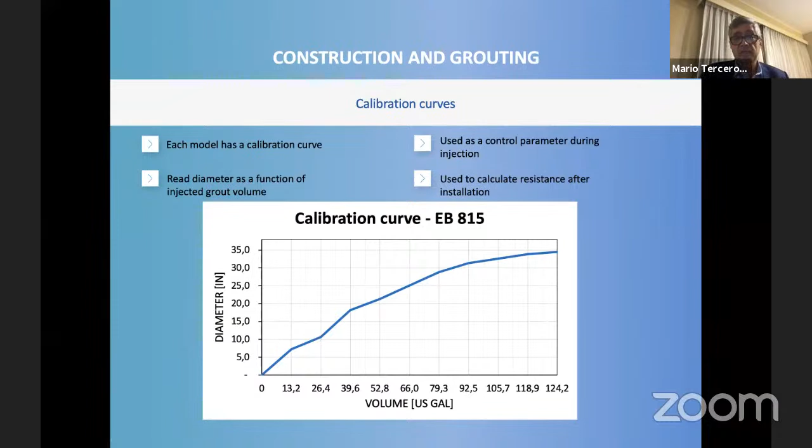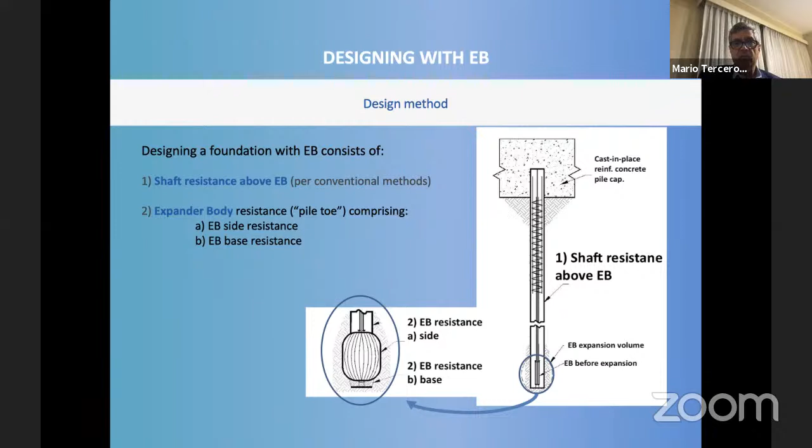We also provide post-grouting because in soft soils it helps to reduce settlements. And it works like a pressurometer, and that's why we get the typical injection curve, which is very similar, but this is a very high deformation pressurometer. We have performed several loading tests and correlated them for different elements with CPT, SPT, pressurometer, and other methods. So as we get so much information from each pile, the correlation with the loading test is much more accurate.

Okay, here are typical methods of calculation. The method based on the pressurometer is perhaps the most accurate one, but we have also made correlations with SPT. I don't like it, but the problem is that in South America it is a very common test, and we use a lot of CPTU.

This method has also been calibrated for the local soils, because as engineers we also have a parameter that varies from 1.9 to 4.5. So if we don't get a good calibration, it's kind of crazy. But now we have installed more than 30,000 around the world, and it really works.

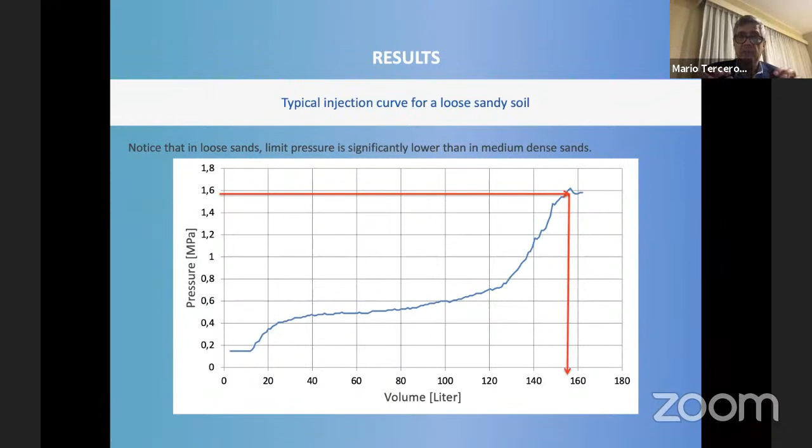What happens if I have a loss of pressure? Then we know at which pressure and which volume, and we can calculate. All those are real curves. This is a very soft sand. And at the end, all goes to the critical condition, because the concept is that the shear is fully mobilized around the element.

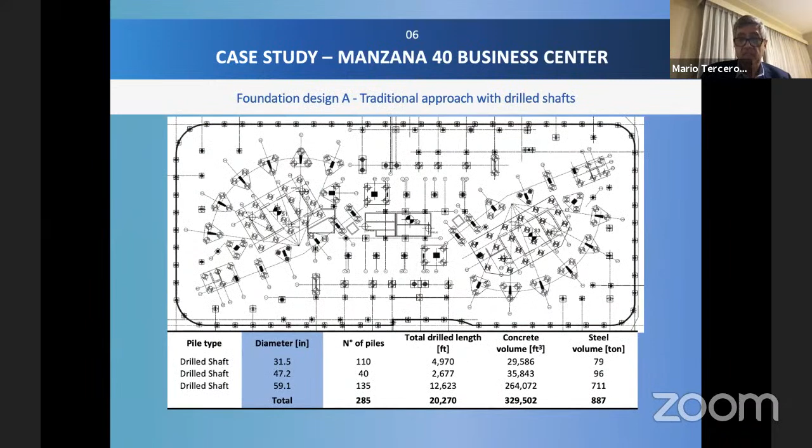And this was a summary of different piles without any kind of tip improvement and with expanded body or full displacement piles. This is a case where those buildings were finished 6 months ago. This is a big project with more than 800 piles. And in that case, we saved 63% of the volume of concrete, the same in steel, and in time, and in cost, because with higher concrete quality, of course, it is cheaper and faster, much faster.

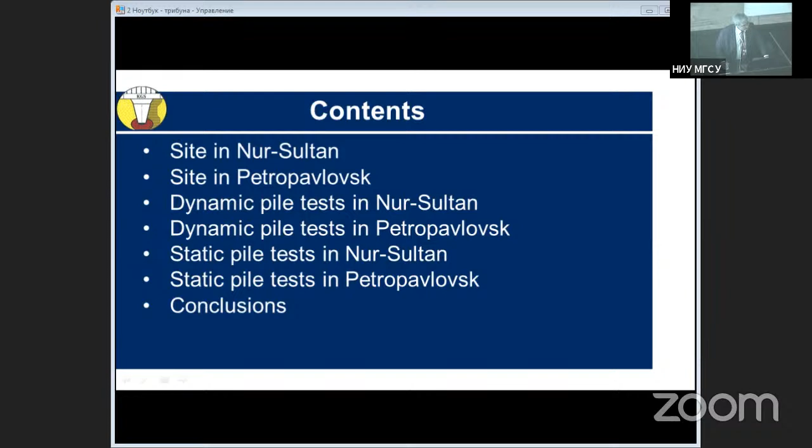So this is the site in Petropavlovsk. This is a little bit smaller because it is not as big a city as Nur-Sultan, about 540 beds. This is also a very interesting project because in Petropavlovsk the soil ground is different than Nur-Sultan.

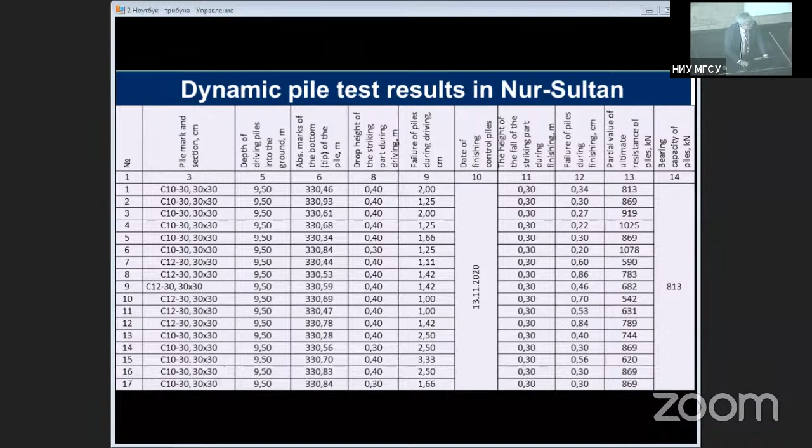We carried out some dynamic tests. This is the dynamic pile test results. You can see the bearing capacity is around 81 tons, and the date of testing and parameters of the piling, length about 10 to 12 meters, in Nur-Sultan. Cross section is 30 by 30 centimeters. This is the dynamic pile test in Petropavlovsk.

We also carried out our test in the winter time, using the Junttan PM25. You can see several piles between 1 and 17. This was to understand the drivability of soils for our machines and our piles.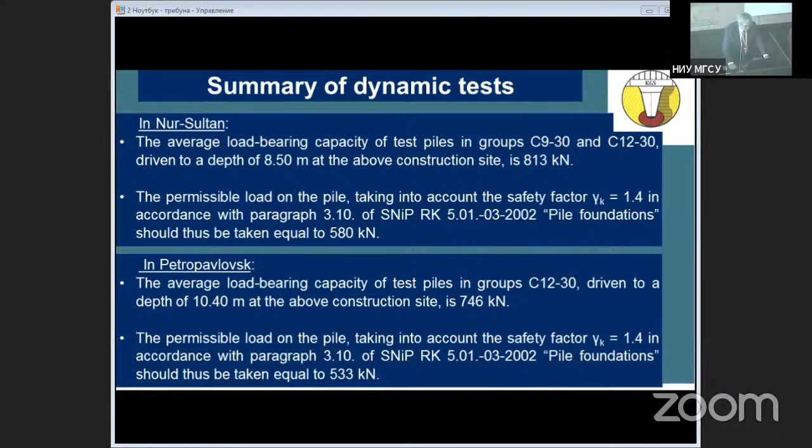This is a static test for Nur-Sultan because our client was a Turkish company. If it's not Turkish, we usually use only dynamic test, but the Turkish company requested us to also make a static test. For the static test, we used our special standard, maybe Russian standard and Kazakhstan standard are similar, with jack, testing beam, etc.

This is the static pile test in Nur-Sultan, showing the testing pile inside the piling map. You can see the static pile results. We also made loading and unloading, and received bearing capacity between 78 tons and up to 90 tons.

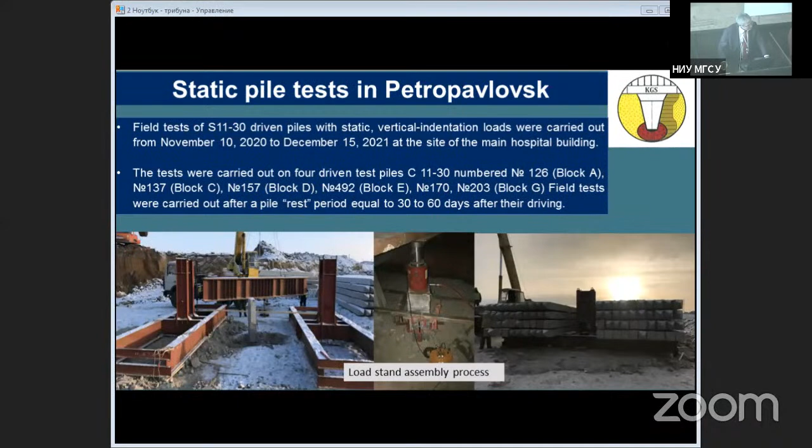This static piling test in Petropavlovsk was made by our PhD students. It's very easy for PhD students, and they also receive a good salary and gain research experience. It's a very interesting combination between research, education, and business, because we sometimes send our students abroad for international conferences, so they need some travel money.

This is the static test for Petropavlovsk city, using the same methodology of loading and unloading. We made the test until 40 millimeters settlement, regarding our standard, which is similar to the Russia standard. This is a summary of static test results for Petropavlovsk city.

Finally, I move to conclusions because time is going quickly. Both dynamic and static tests are very important, but the dynamic test is especially important for understanding drivability, because we know the left side and right side of the piling map but want the central side too. So we understand how the pile can drive into the soil ground, and we also need to understand the dynamic bearing capacity.

But in reality, especially for foreign companies, they also carefully ask for static tests. We make a minimum of 6 dynamic tests and minimum 2 static tests per our standard, but a foreign company requires about 2 times more dynamic tests and about 2 times more static tests. Anyway, the bearing capacity determined by dynamic test is approximately 11%, sometimes 15%, lower than during static pile test results.

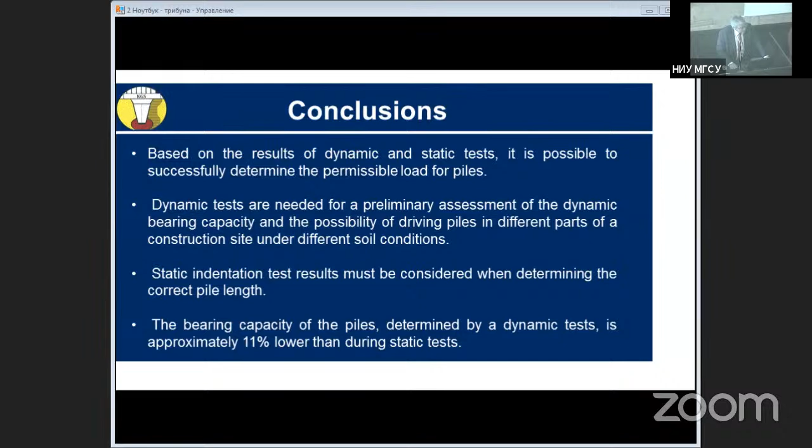We already told you about the 17th Asian Regional Conference, which will be held in August 2023 in Kazakhstan. I want to invite you to this conference, which will be held 16 to 18 August 2023 in Astana. The conference venue will be the Expo Congress Hall in Nur-Sultan.

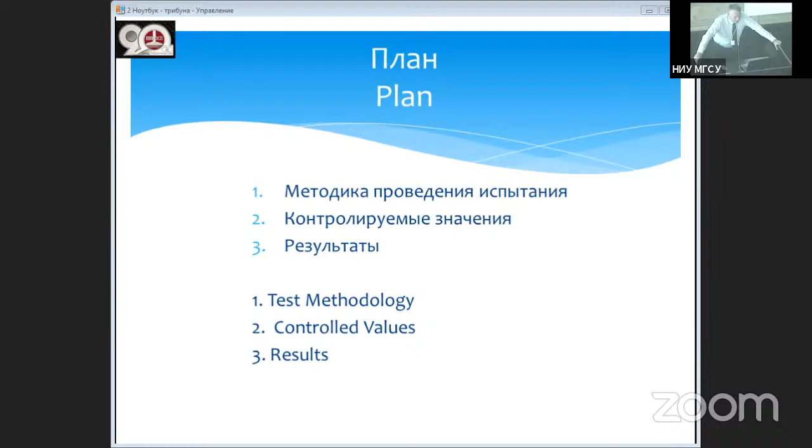Методика проведения испытаний заключается в том, что не нужно возводить большие конструкции сверху сваи, сама свая является опорой для проведения испытания. То есть верхняя часть сваи сопротивляется в процессе испытания нижней части. Для этого закладываются домкраты и проводятся испытания.

Домкраты могут быть в 2 уровнях, и это лучше всего располагать их в 2 уровнях. Здесь мы можем провести испытание нижней части сваи, можем провести испытание средней части сваи, давая нагрузку с помощью верхнего домкрата. Получить одновременно сопротивление по нижнему концу и по боковой поверхности.

Для чего проводятся испытания свай? Такие буронабивные сваи, как правило, устраиваются у нас для фундаментов высотных зданий, и там, как правило, поле свай. А когда у нас есть поле свай, нас не интересует несущая способность одиночной сваи, нас интересует совместная работа сваи с грунтом и взаимодействие свай между собой.

Поэтому возникает необходимость решать задачу не несущей способности сваи, а первое – это апробация расчетной модели, уточнение механических характеристик грунта путем обратных расчетов, и в какой-то степени определить сопротивление грунта по боковой поверхности и по нижнему концу. Для этого, кроме домкратов, сваи оборудуются еще системой датчиков, чтобы по результатам решить обратную задачу и определить все эти параметры.